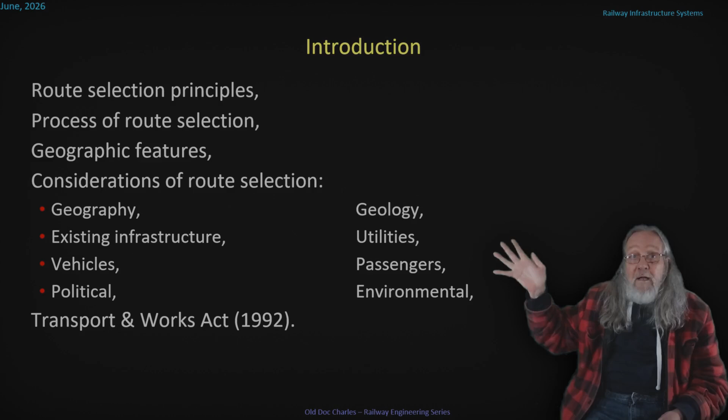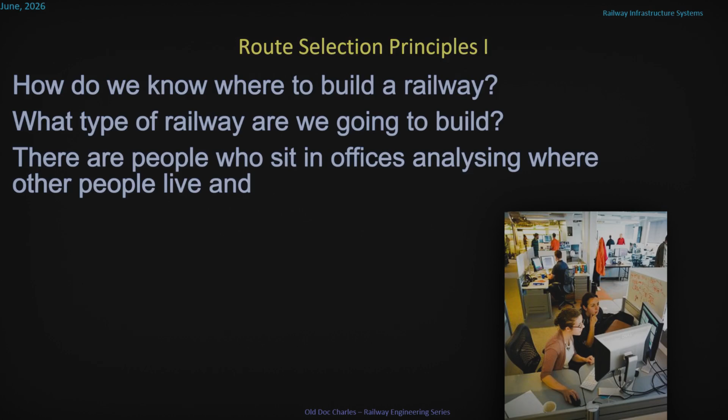How do we know where to build a railway, and what type of railway are we going to build? Well, there are people who sit in offices analyzing where other people live and where they want to go. This demand analysis shows that building a railway between A and B will be beneficial, and depending on the distance from A to B and what lies between them, that will determine the type of railway that's needed.

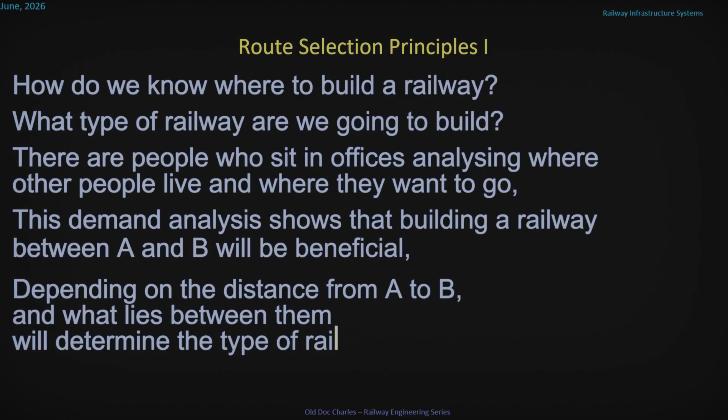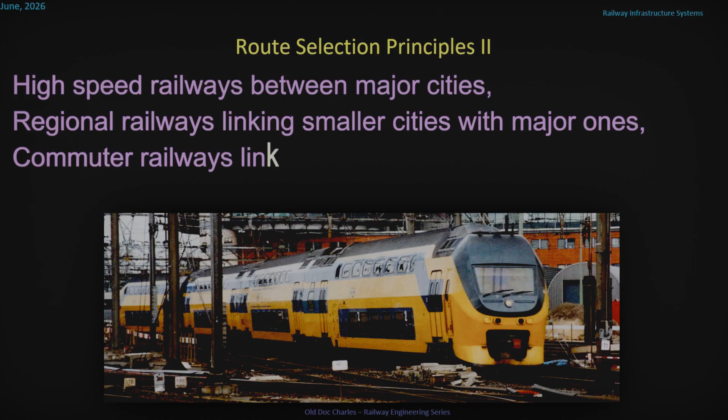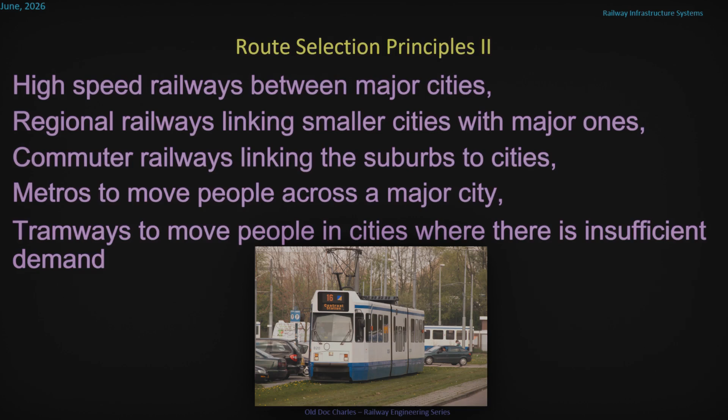High-speed railway between major cities, regional railway linking smaller cities with major ones, commuter railways linking suburbs to cities, metros to move people across a major city, tramways to move people in cities where there's not enough demand for a metro, and freight railways to move stuff from where it is to where it needs to be.

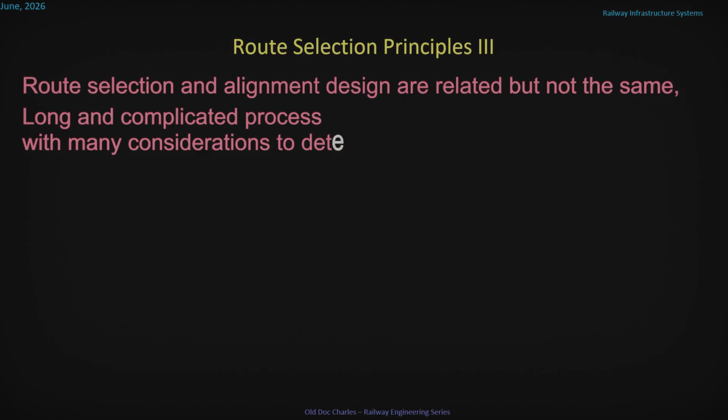Route selection and alignment design are related but not the same, and I'll cover alignment design in a future video. Route selection is a long and complicated process with many considerations to determine the optimal horizontal alignment and vertical alignment, and you have to satisfy the stakeholders, or at least as many as possible.

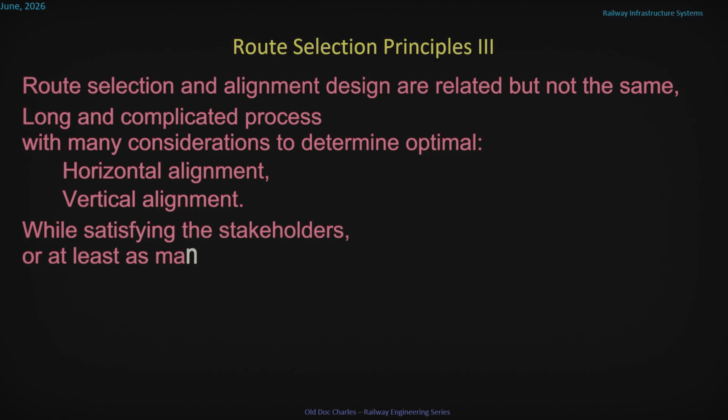Now, you can't just go out and build a railway. You need to go cap in hand to the government, and they will assess your routes based on 5 criteria.

The environment. You need to protect the environment and improve health by investing in public transport and other types of efficient and sustainable transport which minimize emissions and the consumption of resources and energy.

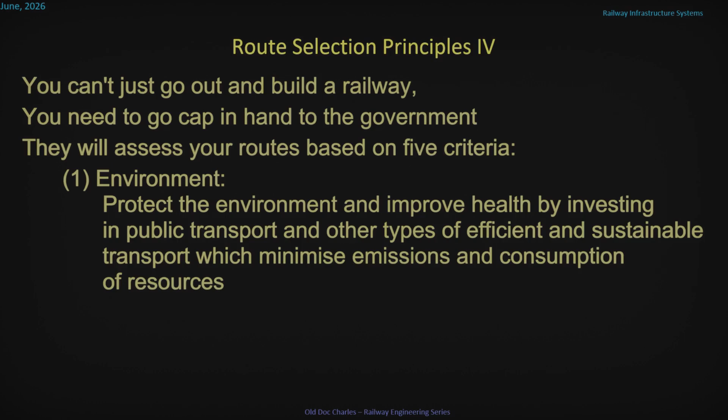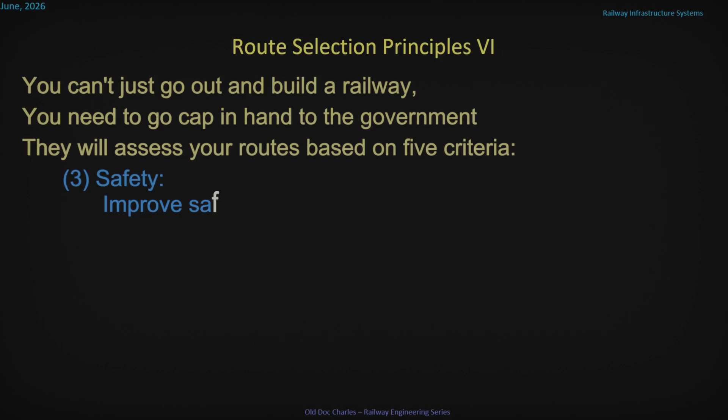Safety. We need to improve the safety of journeys by enhancing the personal safety of pedestrians, drivers, passengers, and staff.

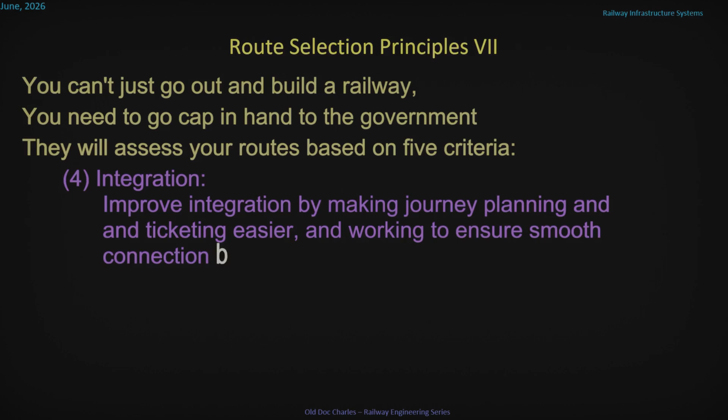Integration. We need to improve integration by making journey planning and ticketing easier and working to ensure smooth connection between different forms of transport. And accessibility.

Promote social inclusion by connecting remote and disadvantaged communities and increasing the accessibility of the transport network for those persons of reduced mobility.

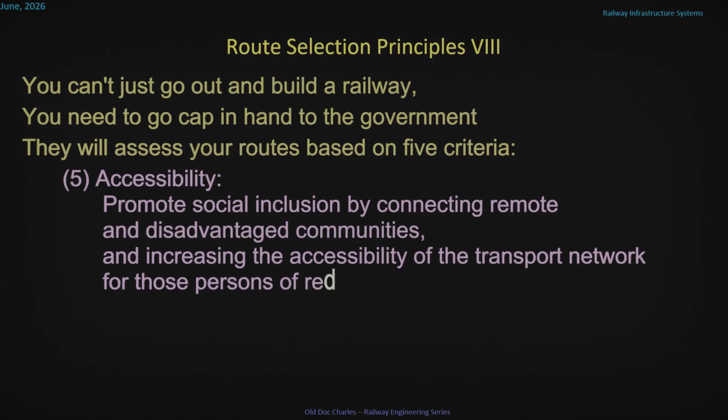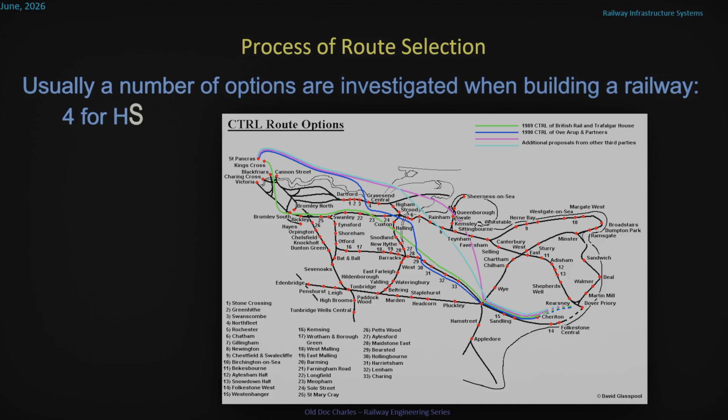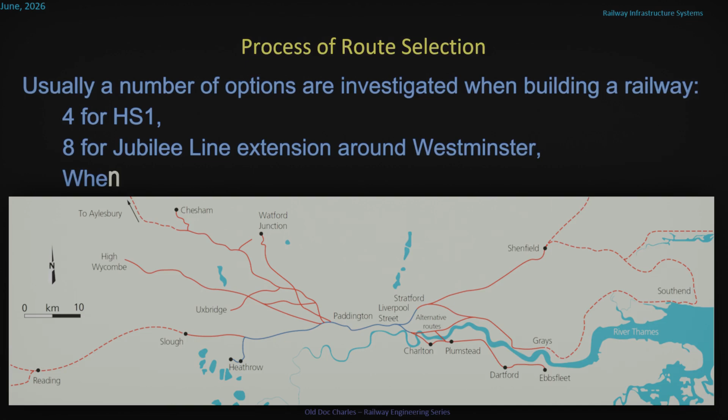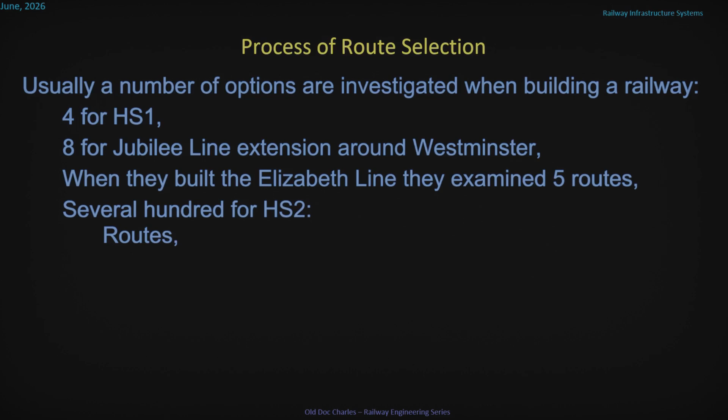Usually, a number of options are investigated when building a railway. So for some examples, 4 for HS1, when they built that in the late 90s. They looked at 8 different options for the Jubilee Line extension around Westminster. When they built the Elizabeth Line, they looked at 5 different routing options. Several hundred when they planned HS2. Of course, this includes not only the routes, but also depots and stations.

Now I'm going to talk about the different considerations that have to be made when selecting a route. Considerations such as geographic features - that's things like hills and valleys and mountains and the like.

Rivers and streams, including their floodplains. If the ground is soft or swampy. Up and down hill requires consideration of traction power and braking characteristics.

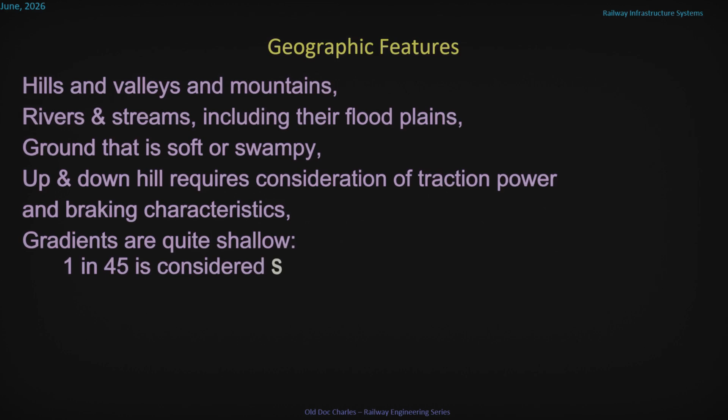So on railways, gradients are quite shallow. 1 in 45 is considered steep. Adhesion-independent traction doesn't really count - that's things like rack railways, funiculars, etc.

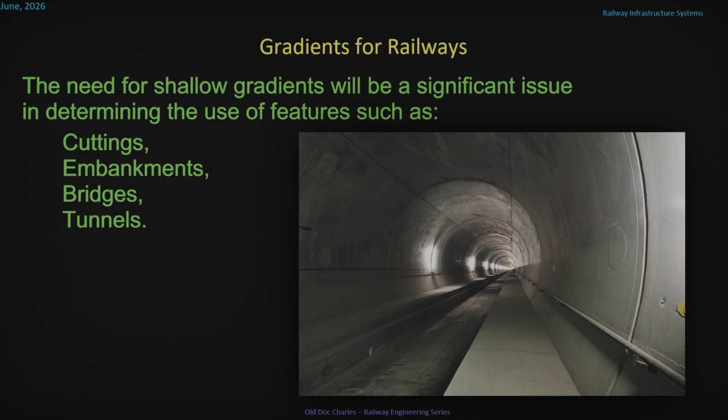The fact that railways need shallow gradients is a significant issue in determining the use of features such as cuttings, embankments, bridges, tunnels, and I'll talk about these in future videos. Gradients are so important that railways produce quite detailed gradient maps and put up signs wherever the gradient changes.

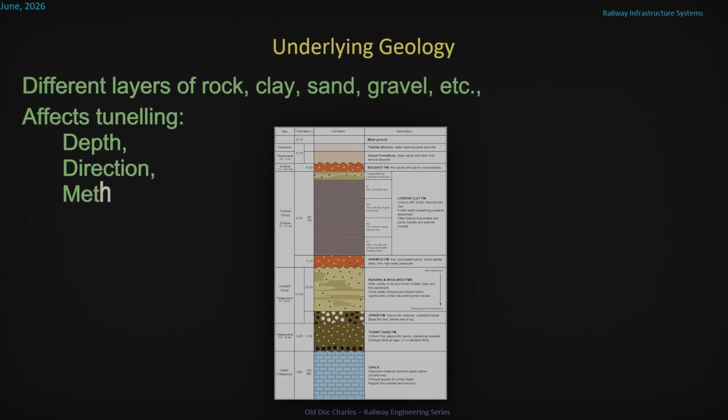Another consideration is the underlying geology - different layers of rock, clay, sand, gravel, and all that sort of material. It affects the tunneling - how deep you tunnel, the direction you tunnel in, and the tunneling method that you use. It also affects the surface track, the surface performance, durability, and the stability of the track.

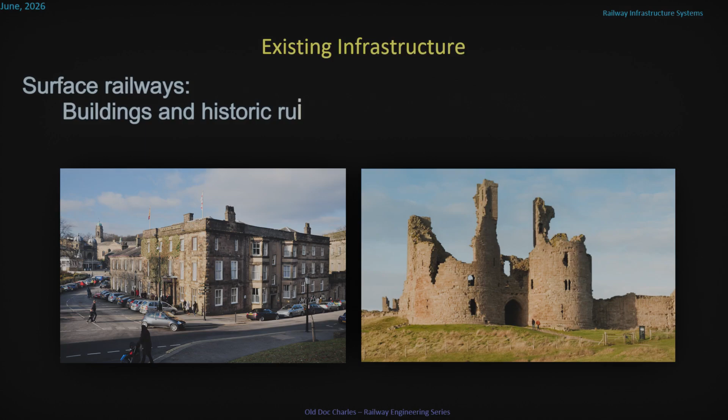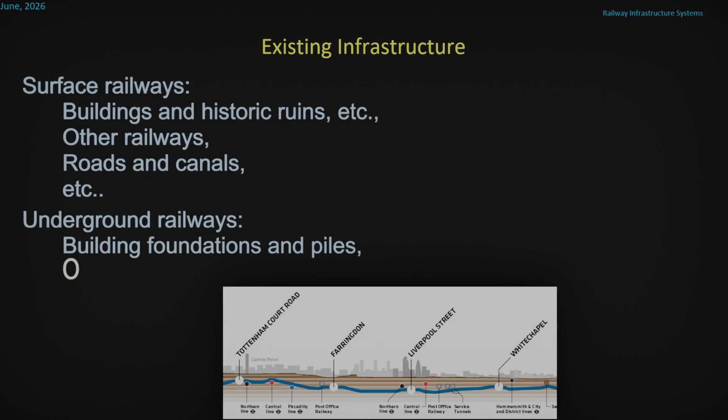Another thing you have to consider is the existing infrastructure. On surface railways, you've got buildings and historic ruins and things like that. You've got other railways, roads and canals, etc. For underground railways, building foundations and piles, other tunnels, which have various functions, sewers and other buried services, etc.

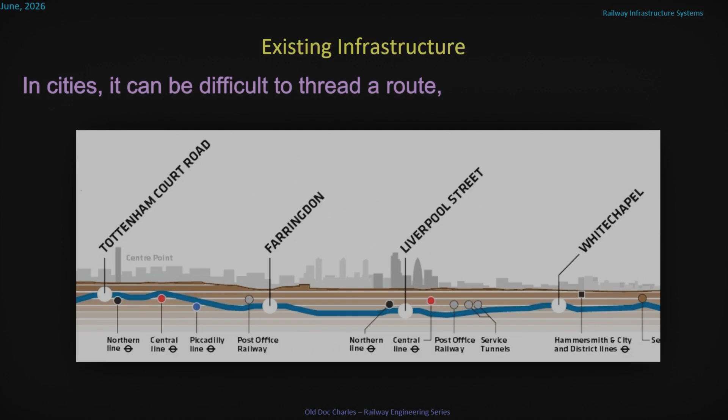In cities, it can be difficult to thread a route. You've got all these tunnels you have to avoid, but you want to be near some of them because you might want to build interchange stations.

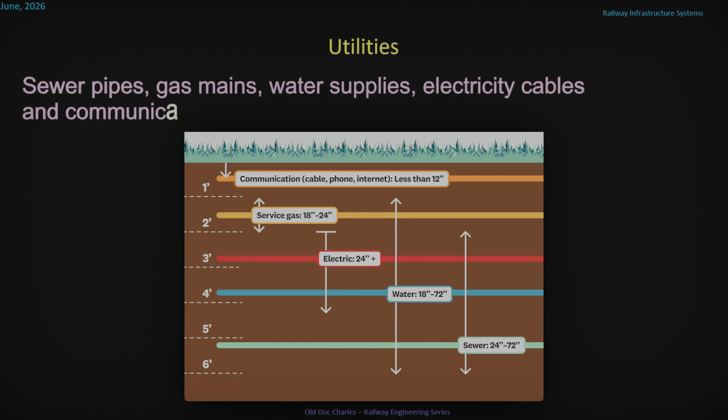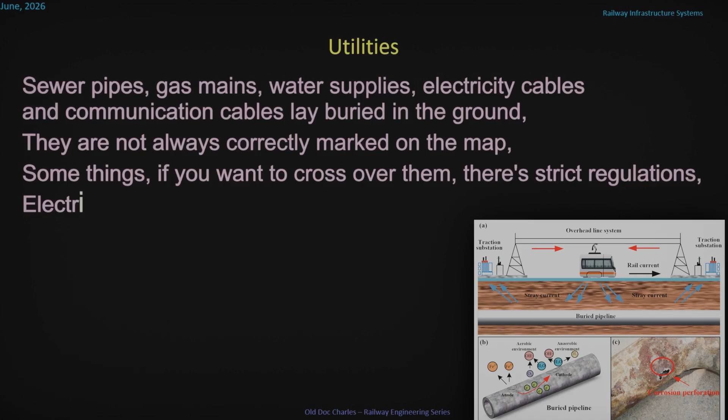You have to consider utilities: sewer pipes, gas mains, water supplies, electricity cables, and communication cables buried in the ground. They're not always correctly marked on the map. Some things, if you want to cross over them, there are strict regulations. Electric railways can cause corrosion of metal pipes. Overhead power lines are always a hazard.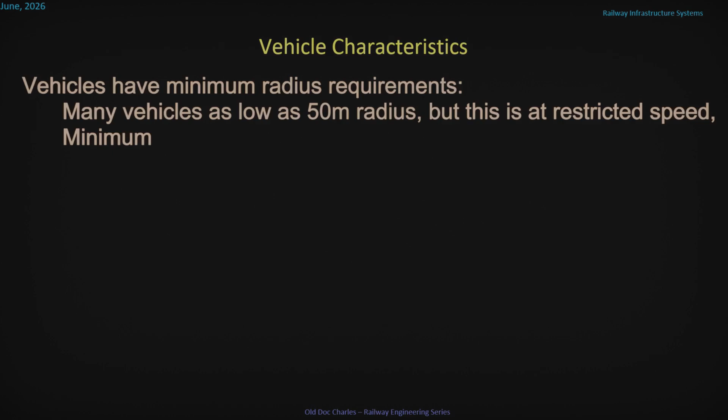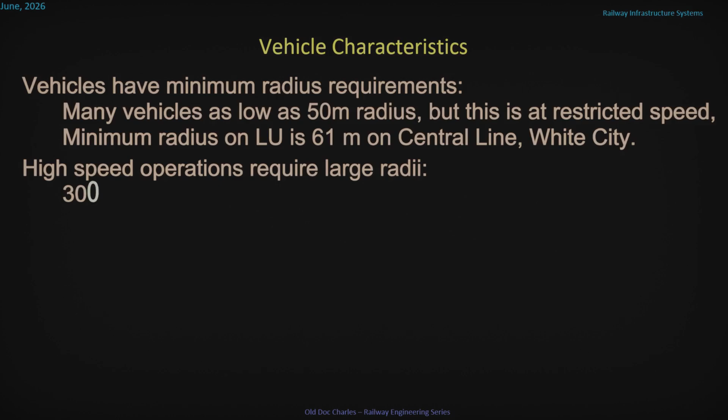You have to consider the vehicle characteristics. Vehicles with minimum radius requirements, many as low as 50 meters radius, but this is at restricted speed. The minimum radius on London Underground is 61 meters, on the Central Line at White City. High-speed operations require large radii, around 3,000 meters minimum radius. Heavy haul freight operations require minimum gradients, no more than 1% or 1 in 100.

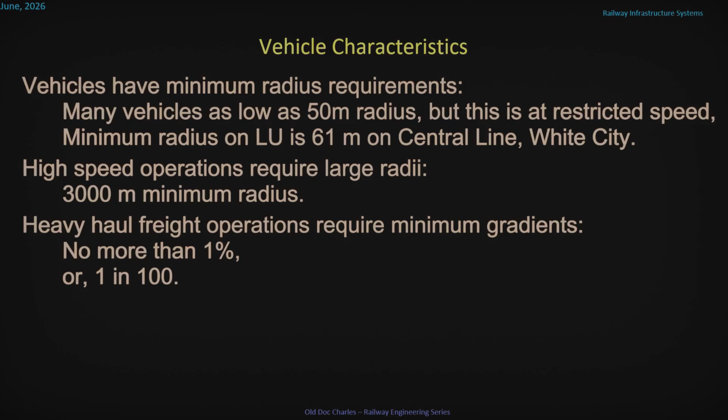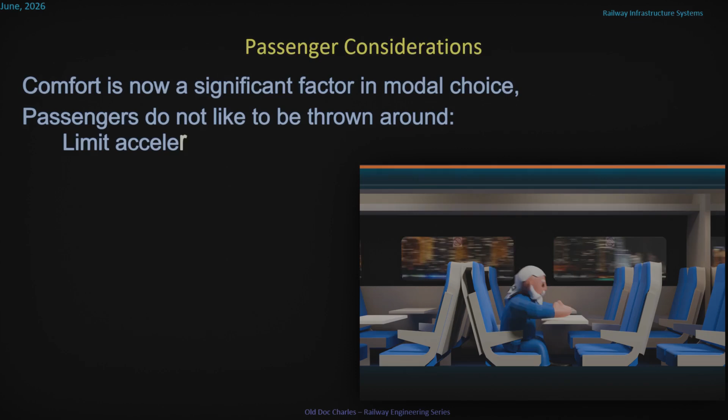You have to consider the passengers. Comfort is now a significant factor in modal choice. Passengers don't like to be thrown around. You have to limit acceleration from stop to stop, limit the lateral accelerations, limit the vertical accelerations, and limit the jerk in all directions.

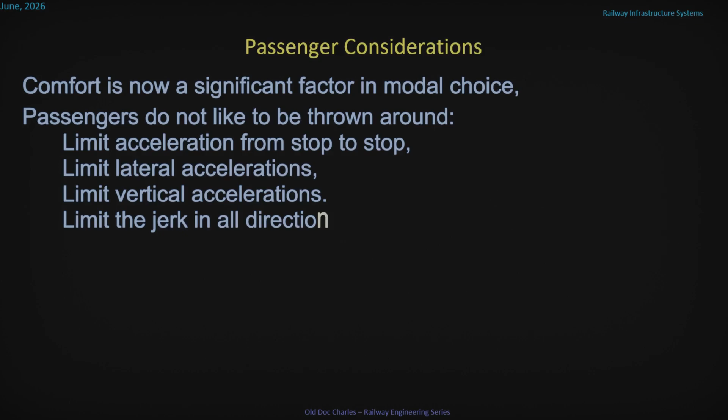There are political considerations. Politicians may lobby to have a route built through the middle of their town so they can have a station and put it on the map. NIMBYs will form pressure groups to block a route being built because they don't like the smell or whatever.

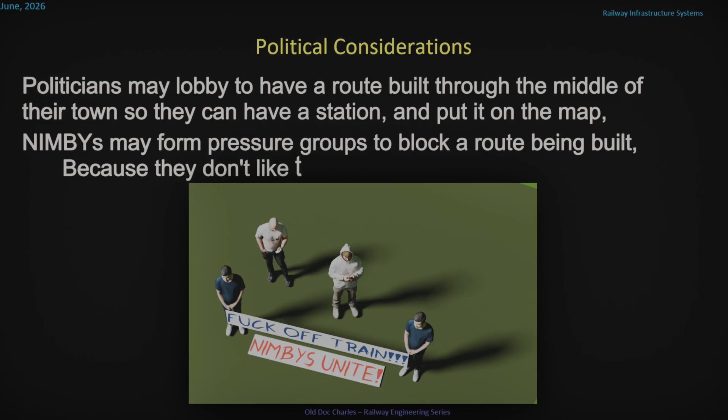You have to consider land contamination. The land may be contaminated by any number of toxic chemicals carelessly discarded before anybody cared about the environment. If you're using an old railway alignment, you need to consider contamination from previous traffic, whatever the line carried. All this stuff is very expensive to clear up. Archaeologists may want to dig your cutting with a trowel and dustpan.

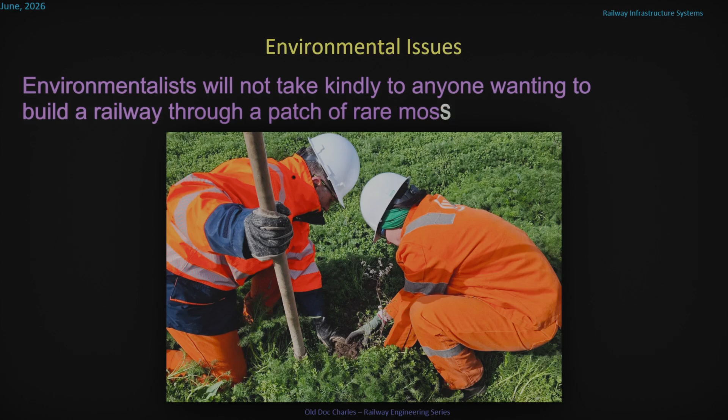There are environmental issues to consider. Environmentalists will not take kindly to anyone wanting to build a railway through a patch of rare moss or bulldoze a newt. Rare snakes and other creatures can be captured and relocated. Some people just don't like the railway to spoil the view.

You have to have an environmental impact assessment, an EIA. That will help you identify problem areas and is really something you have to do before you can get permission from the government to build a railway. A thorough EIA is very expensive, but it can save money in the long run.

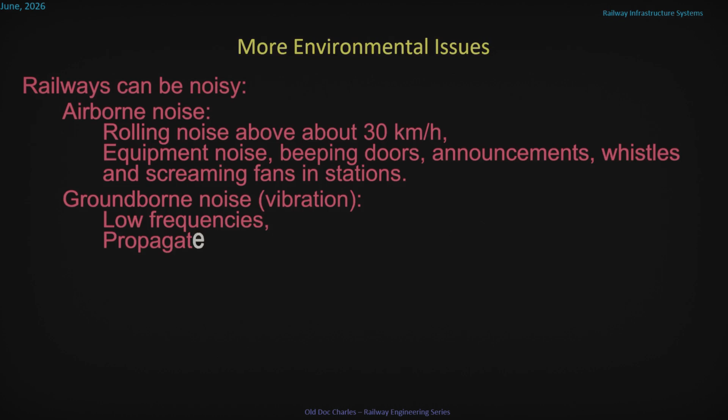Railways can be noisy. There's airborne noise - rolling noise above about 30 kilometers per hour - equipment noise, beeping doors, announcements, whistles, and screaming fans in stations. You've also got what they call ground-borne noise, that's vibration, generally at low frequencies, which propagates from the track bed and through tunnel walls.

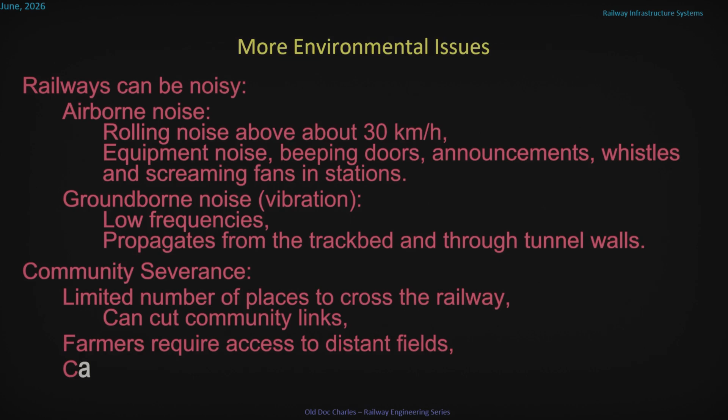There's community severance. You've got a limited number of places where you can cross the railway, which can cut community links. Farmers require access to distant fields, which can lead to trespassing and other social issues.

In the UK, you have to get what's called the Transport and Works Act 1992 order - a legal planning process to enable the promoter of a scheme to gain the legal authority to build it. Under the TWA, an application is made to the TWA Orders Unit, part of the Department for Transport. You need to submit a full proposal, draft order, a statement of the aims, a summary of all the consultations with stakeholders, plans and cross-sections of where you want the route to go, the environmental impact assessment, the names of the owners of any land you're going to compulsory purchase, how much it's going to cost, and where you're going to get the money from. If the government are happy with all of that, they will grant you permission.

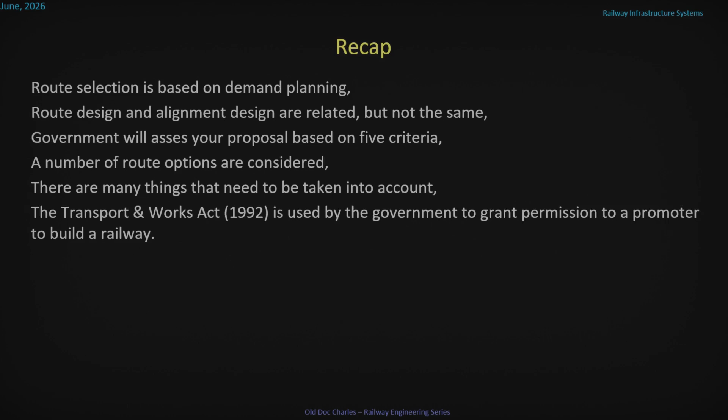That's basically it - this is all the stuff I've talked about. It's traditional to include a recap, and there is. Yeah, I think that's all. Next time, I think I'll talk about alignment design. Yeah, I think that needs to be all.